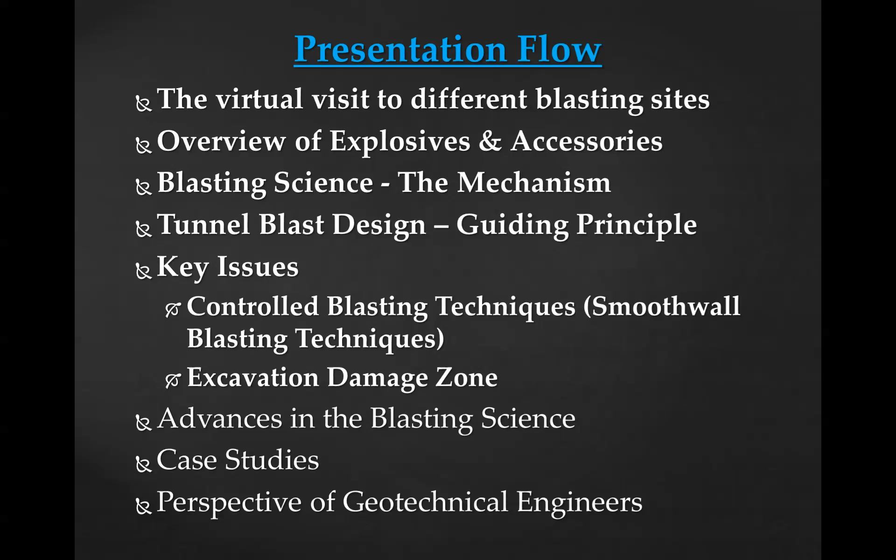So let me take you to the first slide. As we all know, most of you can identify with the photographs itself. This is one of the most prestigious projects of Tehri hydropower complex, and this complete project is excavated with the help of the drilling and blasting system. If you see this PSP 3D layout, left bottom, this is such a complex underground structure.

This will be constructed close to the underground structure which is already in operation, which is at my right side, called Tehri hydropower. So this is Tehri hydropower on my right side, and close to that there is a PSP we are working on. This complete underground structure is right below the hilltop you are seeing in my right top corner. You can see the dam structure, earthen dam structure.

This is one of the most beautiful structures, and I would like to present you some of the critical excavation that has been done in this particular project with the help of the drilling and blasting system.

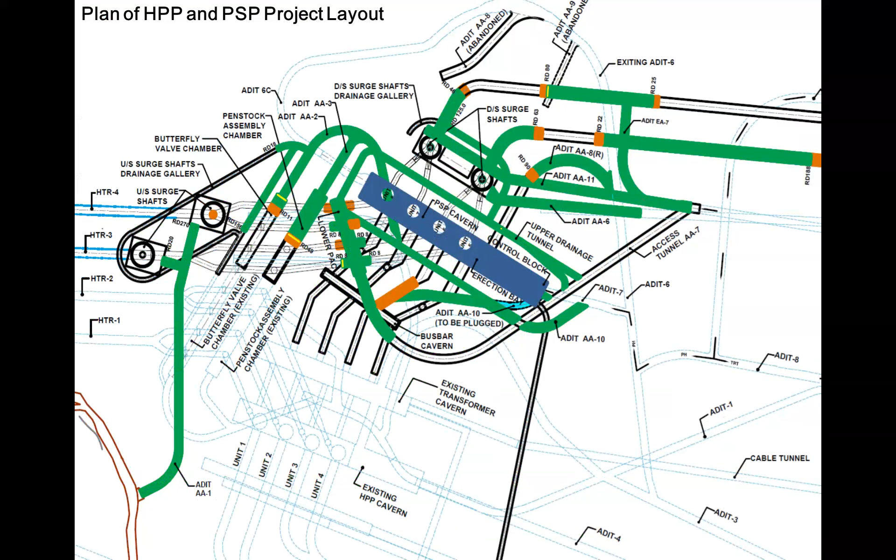If you closely see this dash line, this is basically the old hydropower structures which is already in operation. And the ones in different colors, blue and green, they are under excavation. You can see the blue color, PSP cavern, that's powerhouse cavern, and that is very, very close to the existing operational hydropower structure.

If I show you a simple diagram, see this. The one at my left top is basically the machine hall, where the hydropower generation is continued. And to this machine hall, the powerhouse's main access tunnel is Adit 3, which is in my left bottom.

Now if you see the right top, you can see the distance between existing Adit 3, that's my left bottom, and the new bus bar excavation, that is hardly a distance of 2.6 meters. Please mind the size of excavation going on. Adit 3 is almost 10 meters in diameter, the bus bar is also almost 8 to 9 meters in diameter, and this has been completed very recently.

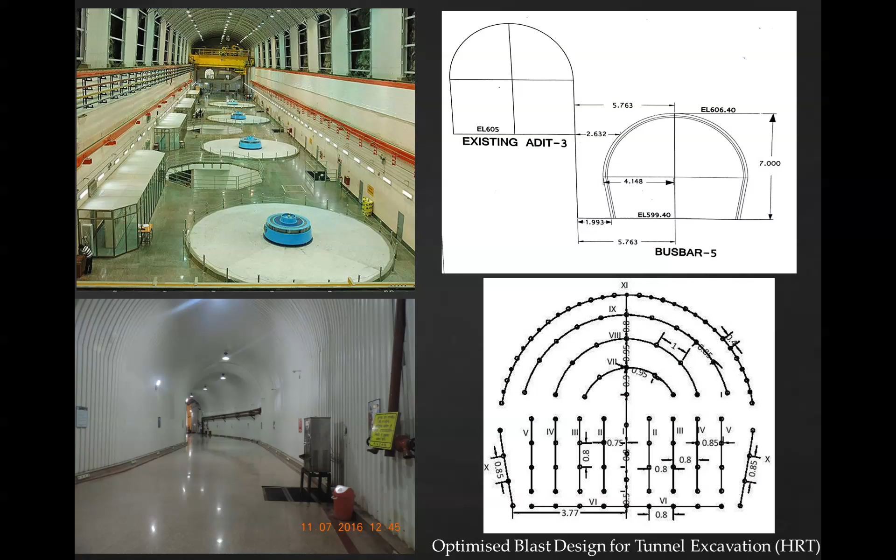I would like to show you some photographs of that particular project. This excavation, you can see, is a major breakthrough recently, around a couple of months back. What I mean to say is, even in a very, very difficult situation with a parting distance of hardly less than 2.5 to 2.6 meters, excavation can be done in a very controlled manner. Of course it took some time for us to get a breakthrough, but fortunately we could do it.

This is another powerhouse, PSP, you can see. I will show you the next stage also with the current stage, and then the breakthrough of the butterfly valve chamber, my top right. This is the machine hall. This was around 3-4 months back.

Now you can see the kind of opening within the same span. There are a large number of openings within the same structures, with parting less than 10 to 15 meters. This has all been excavated with the help of the drilling and blasting system, and it is a large cavern of almost 200 meters in size.

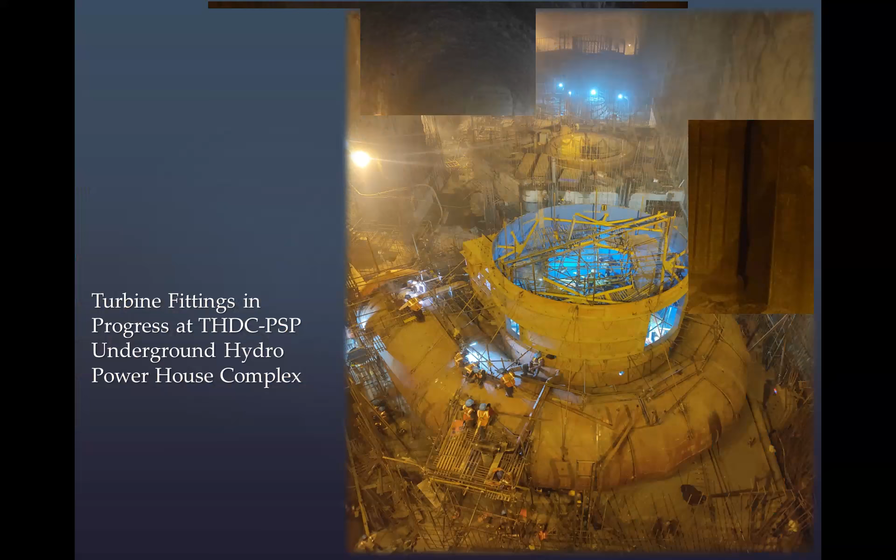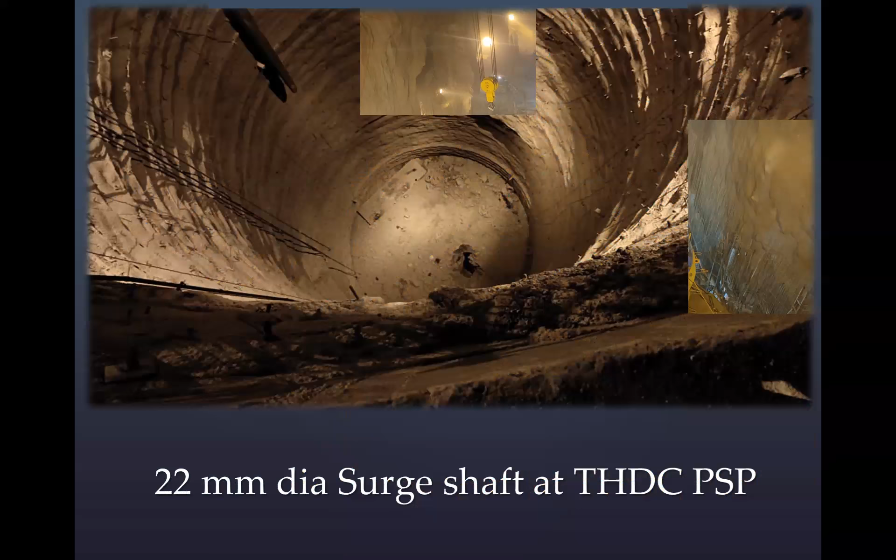This is what is happening now. The machine hall is getting ready, and two turbine pits, the mechanical systems, are actually in progress. Coming to the next one, this is almost 22 meters of shaft. This is also under excavation with the help of the drilling and blasting system, and it is very, very critical. You can understand, a 22 meter underground surge shaft.

Okay, this is another photograph of the Pune metro site. What I wanted to show here is there is a civil court at a distance of 20 to 25 meters, and this excavation is going on. See what happens when judges are close to your construction site - you have to be very careful, and the kind of precaution that is in place.

There is a tunnel going below this building, completely excavated with the drill and blast system. So the vibration limit, which is very stringent in our Indian condition, has a further restriction by the Supreme Court. They are allowing 2.5 millimeter of peak particle velocity, not more than that. So we need to be very careful for excavation within the drilling and blasting system.

This is one desilting chamber. You can see there's such a large cavern. This is a THDC project, Vishnugad Pipalkoti Hydro Power Project. I'll go to the next one.

Now this is what I was trying to explain - this is partly an extension of what Professor S.A. Gupta Saab, who was from Mumbai Metro, was explaining, and I am associated with them for this drilling and blasting system. This is basically the case of Kalba Devi Metro Station. This is a 3D diagram, and this complete NATM excavation is to be done with the help of the drilling and blasting system. This complete structure is just 15 meters below the surface level.

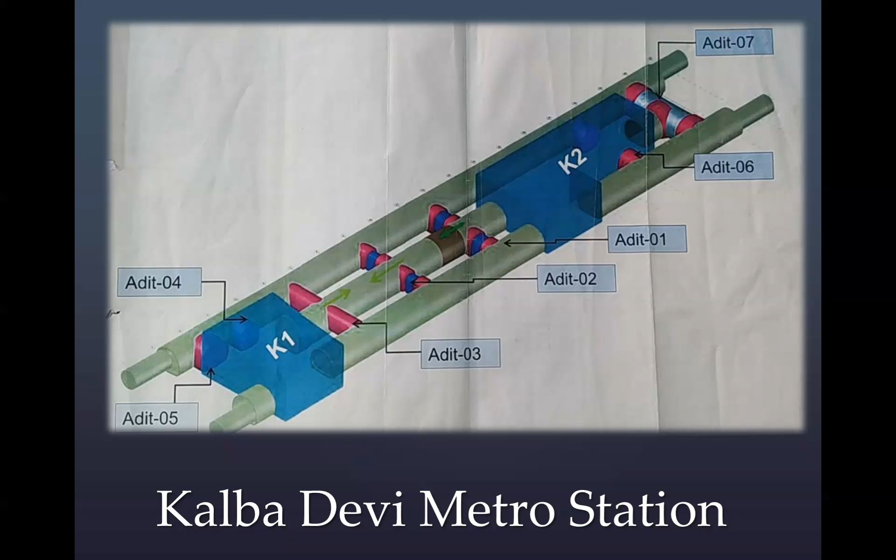If I show you further, you can see different adits, which are in green color - these are all to be completely excavated. And if you see from the top, this is the case wherein you can see high-rise buildings which are in very dilapidated conditions. Even a small amount of vibration can actually create a problem.

Apart from this, there is another factor of human perception also. As Gupta Saab told this morning, people are residing in these houses, and one is the damaged part, but the second part is basically how they are going to perceive the vibration. So it's a complex urban built environment wherein you have to complete this excavation, and you can see at the bottom right. I will show you some more photographs so you can appreciate that.

You see this? This is how small progress we are doing, but I tell you, in the background of this, before starting this drilling and blasting system, they were doing what is called splitters, with more than 200 holes. You can see in my left top the small holes - they were basically for splitters. With this, they took almost 24 hours to advance 30 to 35 centimeters.

Now, with the help of the drilling and blasting system, we are able to advance 1.2 meters in a 24 hour cycle time. So you can understand the kind of impact on the economy and project cost, not only in terms of investment, but also in terms of progress of the work.

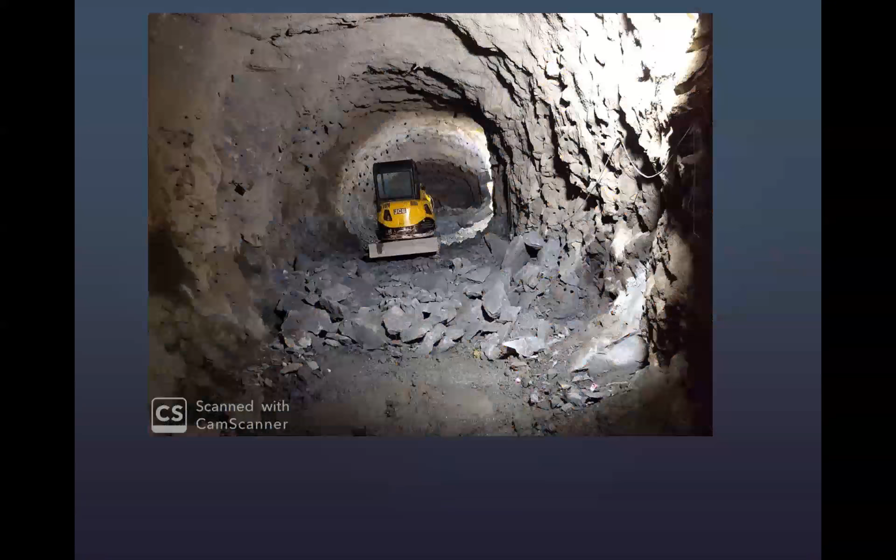I will show these pictures and come to that also. You can see the next stages, and in my right bottom, you can see the kind of progress we have achieved in this underground central cavern. So what I mean is, with the help of the drilling and blasting system, we can achieve wonders, provided we practice doing things in a scientific manner.

These are all different photographs of the same Mumbai Metro project site. You can see the overbreak also at the periphery, the crown area, how beautifully it is controlled. You can see another view of this central cavern.

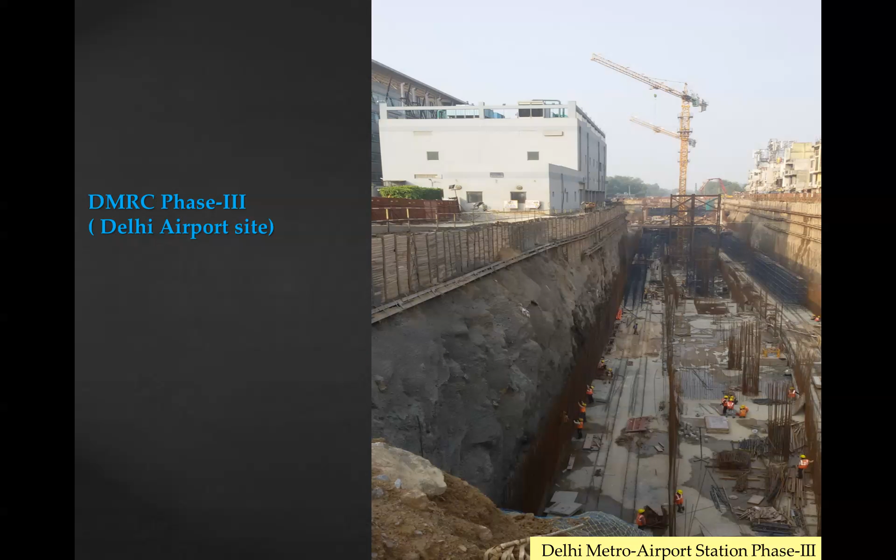Okay, this is an old one, around 4-5 years back, from the Delhi airport site. This is not absolutely because of the drilling and blasting setup - this is basically a blasting assisted mechanical system, I call it. But why I'm showing you this figure is because there is a chiller building, and close to that building there is hardly 2 to 3 meters of distance from where the cutting is started.

So there was dynamic loading because of the blasting, and you do not have blockage also. With all this construction work going on, it is now operational, and the Mumbai Howrah railway line third line project is completed. This tunnel, I tell you, the speed that has been granted by CRS, that is Commissioner of Railway Safety, is 120 kmph. So this is the achievement of this particular project.

This is basically the project site before starting, in the Satluj River. You can see the left bank and the right bank. Now I will show you the next stage. There are different villages called Harnola, Chamian, Kachol, and Kyan. I understand many of you from the audience would have visited or maybe been associated with this project also.

Now coming to this, if you see, the point I want to stress here is there is a pond, and beyond that there is another. I will show you here, let me just move this to the right. If you focus on the decanting area, on the right side you can see there are benches, almost 10 benches. They are 10 to 15 meters high, and they are almost vertical. This is to be excavated from the virgin rock mass.

And there are different structures, villages where this decanting is situated. Actually, there is a village, Chamya village, as they call it. So these are all different types of bench excavations that have been done, and I will show you the photograph. This is actually you can see here - you can see the half barrel marks.

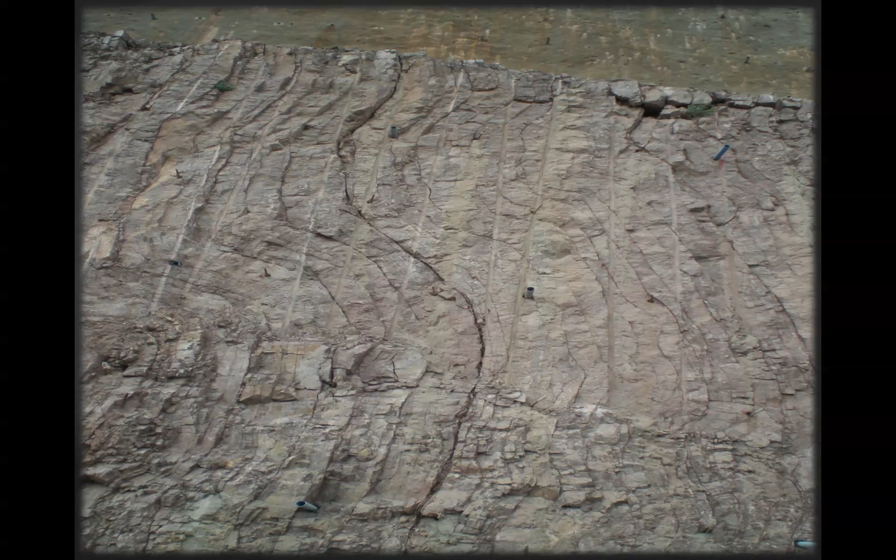That is what, if you come across these contractual documents, you will find that the blasting expert should show at least 50 to 60% of half barrel marks. You can see here, even in an adversely geological condition - not ADG, but a fractured rock mass, jointed rock mass - this is basically limestone, pink limestone, with huge intense folding also. Even then, your drilling marks are visible. You can see here also.

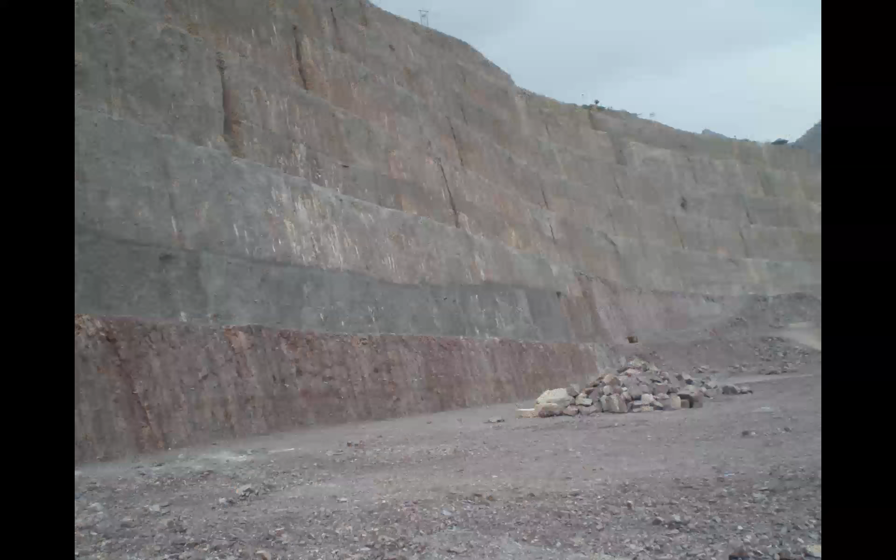And finally, all the ten benches that you can see from here, they are so beautifully excavated like this.

So with this background, what I mean to say is, if you do things in a scientific manner and have a sound understanding of the technical matter and how it works, we can contribute in a very different way and do a good job.

So what actually is a drilling and blasting system? I am going with some basics because I understand most of you are from a different background, and this will be slightly difficult for you also.

Any excavation is nothing but breaking the rock mass into small pieces. The rock mass is available in different block sizes, which may stretch right up to 100 meters. With the excavation process, we try to reduce it into smaller sizes that can be handled with our mucking equipment, meaning reducing it to a size less than 1 meter square, or passing size less than 1 meter square.

So what we need to do is give some external energy which exceeds the peak strength of the rock mass. This is done with the help of two things. One is a mechanical system, which Gupta Sahab explained this morning, including full face machines and partial excavation methods, so I will not focus on that part.

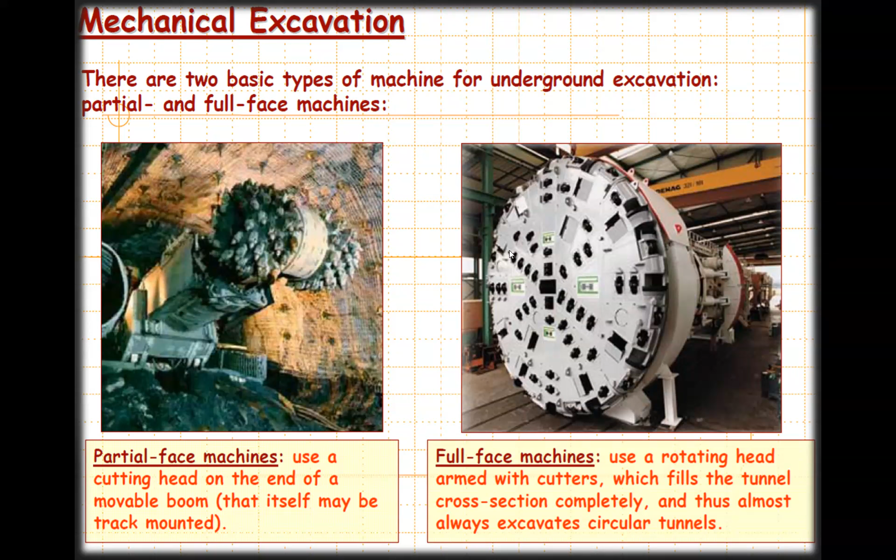There is one point I would like you to understand: the fundamental difference between blasting and machine excavation. In machine excavation, we give external energy with the help of some controlled regulatory mechanism—more time and lesser energy, in a controlled way.

But in drilling and blasting, it is not like that. Once an explosive is initiated, you do not have any control over it. Basically, we are giving a large amount of energy in a very small time. That's the fundamental difference. Because mechanical systems have a regulated supply of energy, the damage is less, or if not planned properly, you do not have control. But in blasting, if you commit a mistake, you do not get a second chance—the very first trial itself has to be scientific and controlled.

So what are the fundamental differences? Of course, mechanical systems are much more productive. Let me show you some figures—in one of the projects, we are getting 20 to 25 meters advancement in a day with the TBM system.

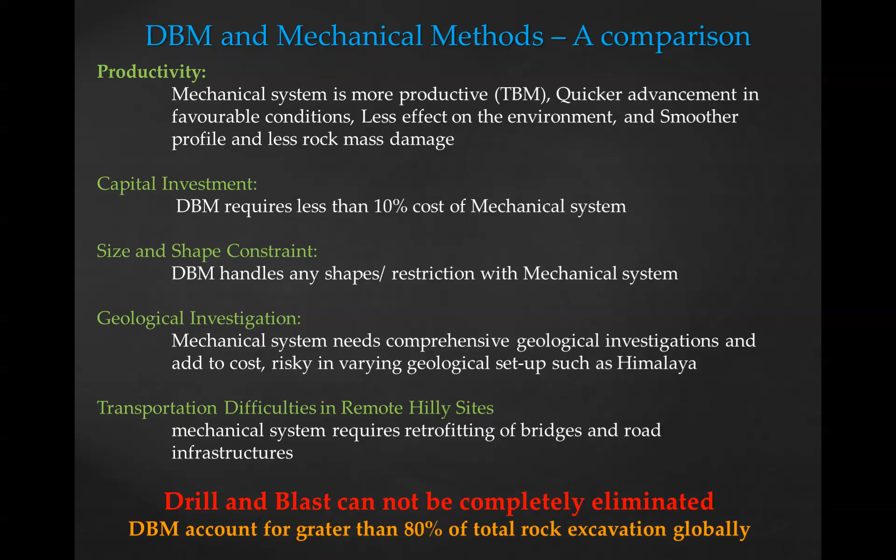In a nutshell, even if you see much more excavation being done with the help of TBM in metros, drilling and blasting systems cannot be eliminated, because there is so much excavation that can only be done with drilling and blasting or splitters. And in case of splitters, there is a heavy problem. So the way ahead is basically how to enhance our technical competence in this drilling and blasting system, so that selectively and scientifically we can apply it. Fortunately, we have lot many cases wherein we can see successful application of controlled blasting techniques, even in very heavy urban built environments.

In a very simplistic way, a conventional drilling and blasting system can start somewhere around the drilling system. We need a drilling machine. Let us start with survey. First, we survey, mark the profile, drill the holes, and load. Load is a term normally used in blasting science to put explosive into the holes. After loading, or what is called alternatively charging, you take the blast. This is basically initiation or detonation of energetic material. Once it is done, the face is ventilated with the help of a mechanical system or blowers. Then excavation is done, and then you do the support system, scaling, and then support system again. So this is one simplistic way of understanding how the conventional drilling and blast system goes ahead.

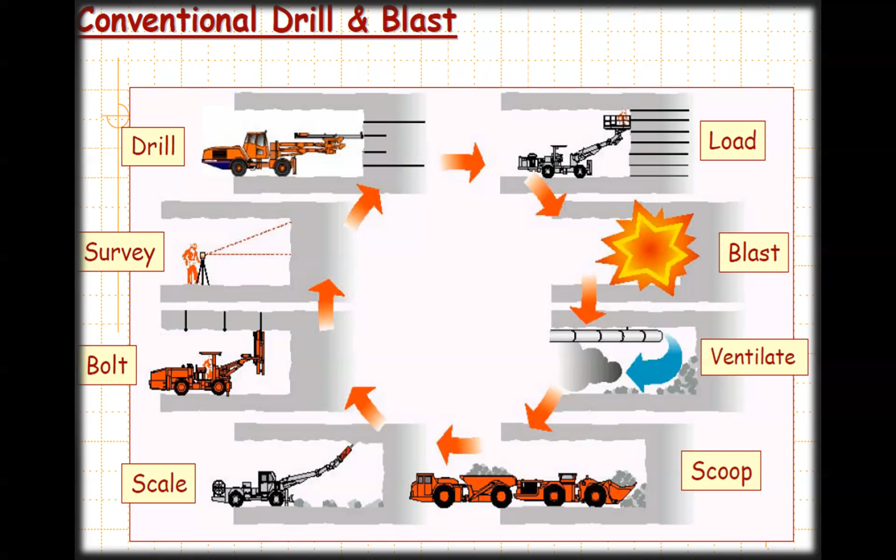I want to show you this because some of you might not have seen how the system works. I know you are all aware about the drilling machine, but there are recent advances where remotely operated multiple jumbo drilling equipments are available. You can drill 3 holes at a time simultaneously. They can be remotely operated, giving you a completely mechanized system. Whatever drilling pattern you want, you can fit into the system, and once the machine is positioned, it can take care of the drilling. That is the recent advancement.

But before that, let us try to understand what blasting actually is. What happens when we put some explosive inside a hole, and once the energy is supplied, what are the things that happen within a fraction of a second? So the first term I'm going to introduce is detonation. The energetic material, or the explosive, when you give some shock to it, it detonates. Detonates means very fast burning, accompanied by release of energy in a very short duration.

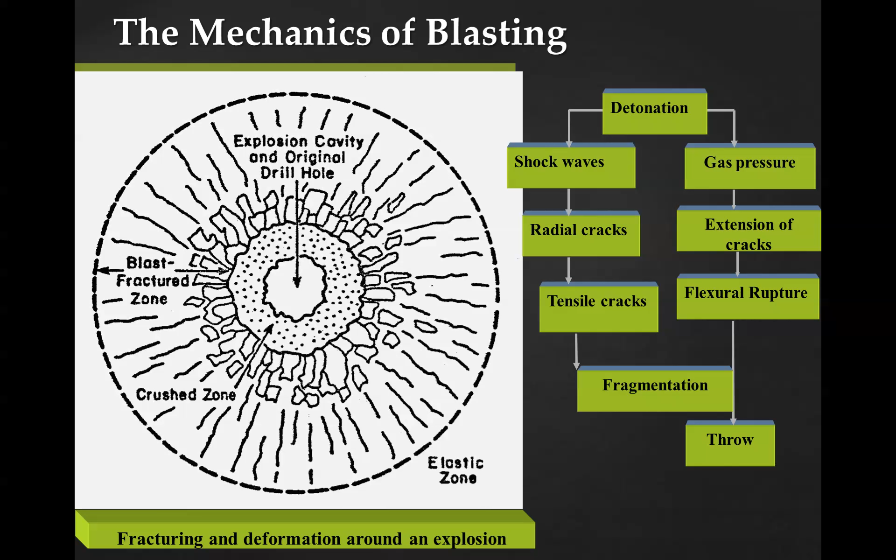Just to explain some basic understanding, an explosive, in a very simplistic way, is nothing but something that burns, but the difference is it burns at a very fast rate—fast meaning around 4,000 meters per second. So when it burns, it has a combustion component which works as a fuel, and then we have a combustion component called the oxidizer, because it supplies oxygen when it's inside the hole.

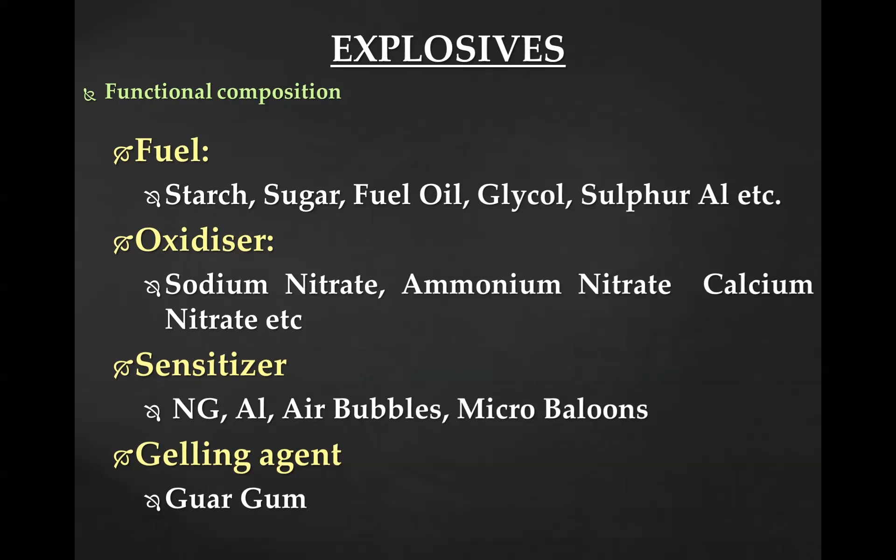There are some chemical combustion reactions to make the product stable. Fundamentally, for us, it is a material which has basically a fast burning rate, more than sonic velocity actually, so that is called detonation.

This is one term I wanted to explain. You see here 601, 901, and here also Superpower 90. What I want to show is basically the material comes with different properties. One of the properties is strength of explosive. Strength means basically what is the measure of release of energy. This 90 means 90% strength, it's 90% release. It's basically in reference to one old explosive which is called blasting gelatin, but let us not go into that part. Basically, when it is 90, it is 90% strength. This is the most powerful which is available.

If you see here 601, that is basically 60% strength. So when we talk about the use of this, when you go to the site, you can see what type of explosive the contractor is using, and if you see there is overbreak or some rock mass damage, you can always insist he use 60% strength or 90% strength accordingly, as per the rock mass condition or the strength of the rock mass.

Then we have some other properties you should understand. One is strength, that I just explained. Velocity of detonation is basically, the cartridge that I showed you, how fast it gets consumed when detonation starts from one front to the last cartridge, so how fast the detonation front moves - that is basically speed. So velocity of detonation is how fast a detonation front moves within a hole. That is velocity of detonation, and that is also accompanied by release of detonation pressure. So strength, velocity of detonation, and detonation pressure - these are all important parameters.

Apart from that, there is another parameter called sensitiveness. Sensitiveness is nothing but, as I told you, all these explosives need some shock to initiate. When we talk about sensitiveness, it's basically how fast or with what amount of shock this detonation is achieved in these explosives, because that is one of the most common reasons blasting explosives fail. If it is not sensitive, or not optimally sensitive, possibly the detonation will not start, and that becomes a very dangerous situation. So it has to be optimally sensitive, number one.

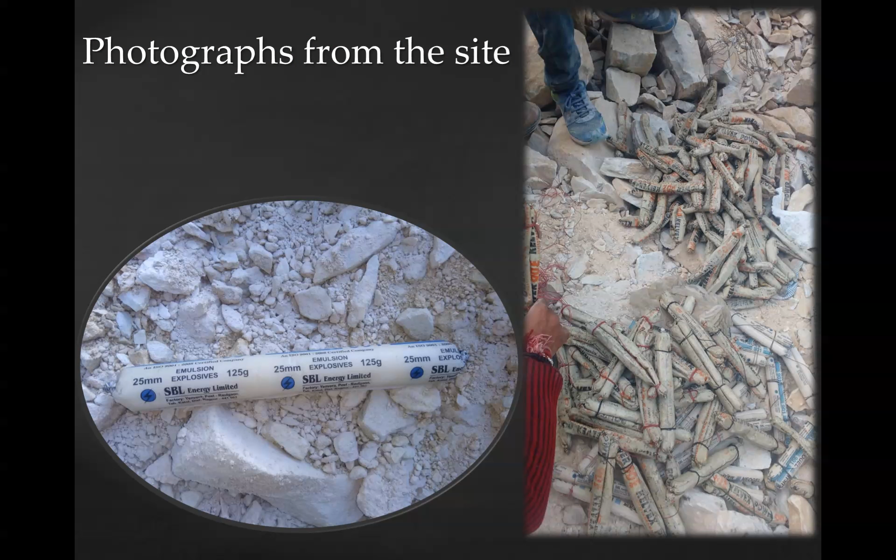Okay, there's another thing you can see in the bottom portion on the right side. What these people are doing, you see 2-3 cartridges tied together. What is happening at a remote site? Suppose we have a hole diameter of 45 mm and the cartridge available is 25 mm diameter. What they do is tie them together and try to insert this. This is not the correct practice, because it actually makes a difference in a technical way, called coupling of explosive materials. What is the annular space we are leaving between the hole and cartridge wall? That's very important. You cannot keep it very large, and at the same time you cannot keep it very tight either. So this makes a difference - there is an optimum diameter of hole and an optimum diameter of cartridge also.

Another important part is, as I told you, velocity of detonation measures the release of energy content in explosive. With the passage of time this is important, because when you go to a remote site there is a tendency that explosive supply will be delayed. You will be getting supplies even after 3 months, 4 months, 6 months time. So with the passage of time it loses some of its fundamental properties, and that is velocity of detonation. Almost 15 to 25% loss of VOD is quite common when going to remote project sites, and that accounts for loss of production. So when you analyze all these parameters, you'll have to take care of this part also.

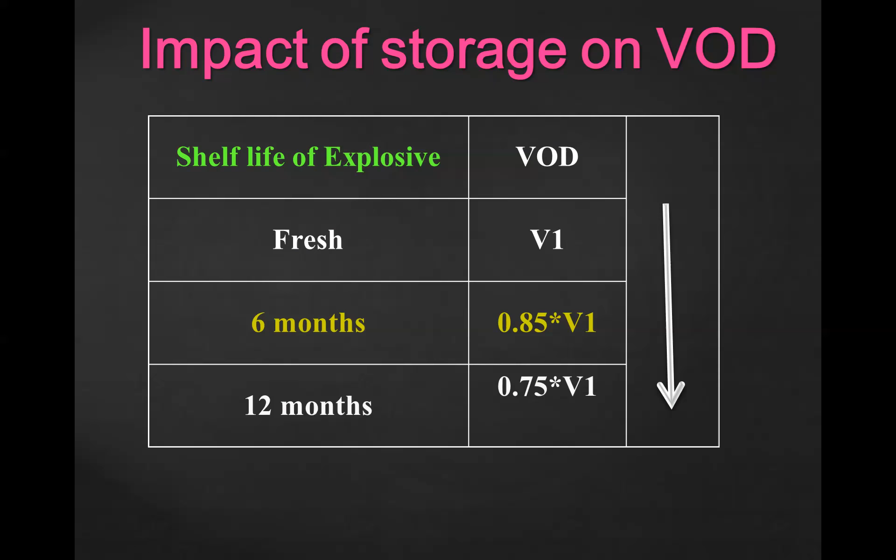So this is something like preliminary things about explosives - I just tried to introduce you, just to have a figure in your mind of how it looks and what you need to understand when somebody talks about a drilling and blasting system. So the first thing we need is an explosive. An explosive comes in different shapes and sizes, starting from 25 mm, it can go up to 83 mm also. Just to have something in mind, the weight is actually 125 grams, and the largest size, which is 83 mm, comes in 2.798 kg. So that is the variation in size.

Now going ahead, apart from explosive, we need an initiating system. Every explosive needs some sort of shock to achieve its optimum velocity of detonation, and for that we use an initiating system, loosely called detonators also. So there are different systems: shock tube, detonating fuse, safety fuse. Safety fuse is the oldest version that you will not come across in infrastructure projects.

I will just try to explain this - what is it actually? If you see firecrackers, the top portion with which we give the first preliminary energy for its initiation, that is basically pyrotechnic combustion. So the top thread portion that you see is nothing but a sort of safety fuse.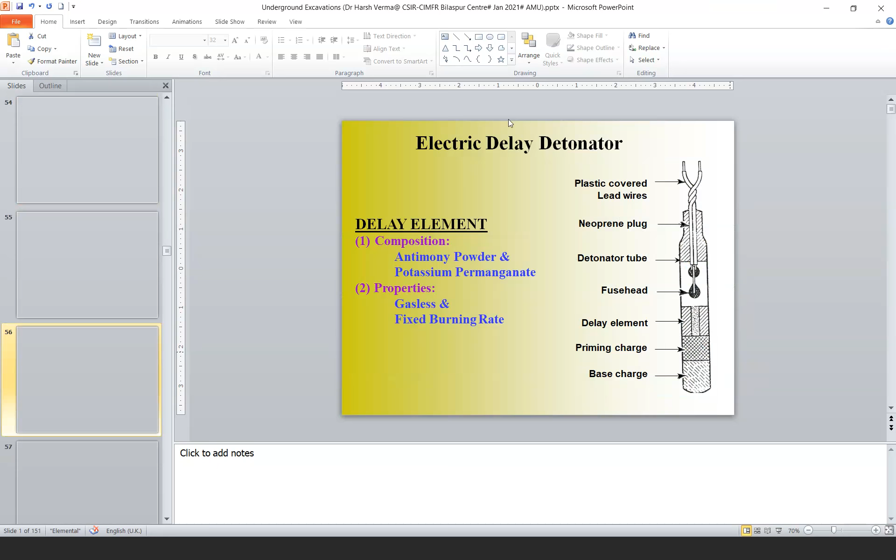So the term I was talking about is basically non-electric system, which is actually used in metro power projects or in urban built environments. So the detonator, I was trying to explain you, this is how it looks like. But fundamentally just keep in mind that these are all the detonators which look like this.

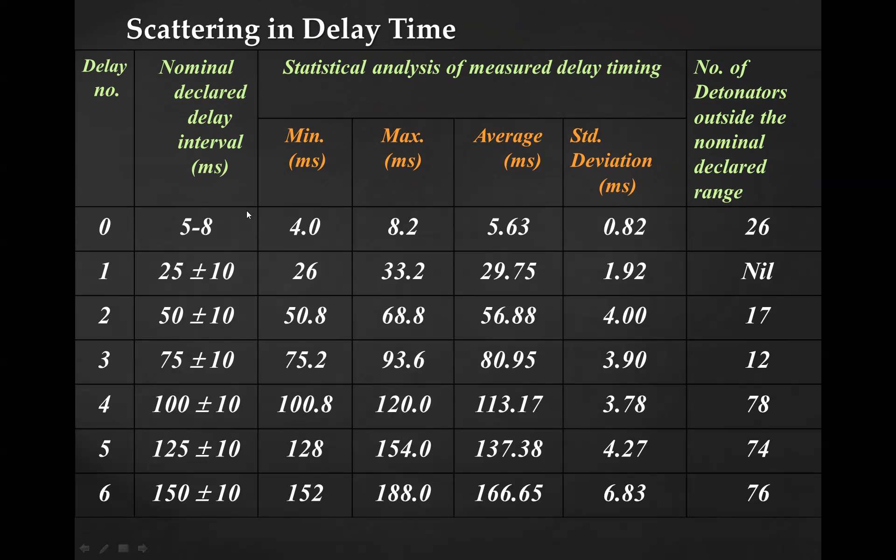With all these systems, the recent advancement is basically a system called electronic detonator system. That is an advancement from this recent technique, which does not actually fail, and we can also assign a predefined delay time, which does not have a limitation of 25 milliseconds or its multiple, or 500 milliseconds or its multiple. We can give any XYZ numbers. So with that, you can optimize the blast design in a more precise manner.

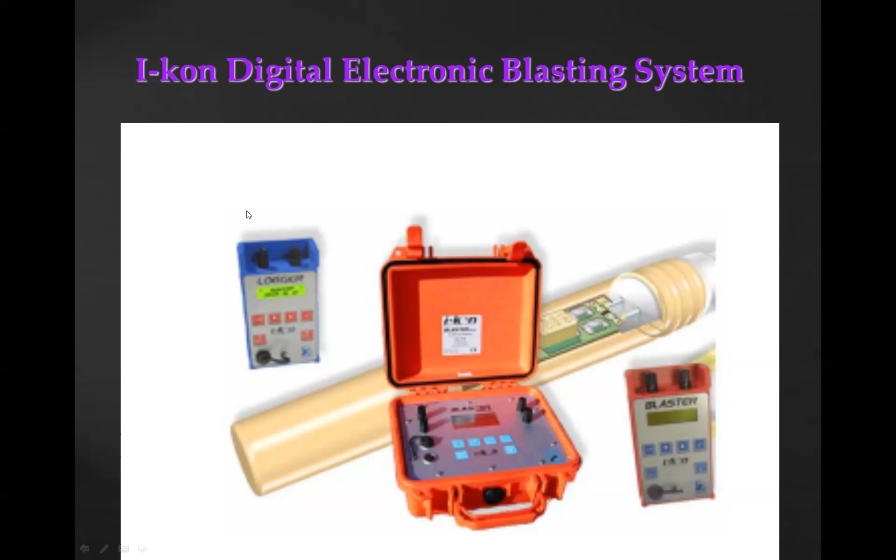I think this one I'll just skip, I'll go to the next one. Yes, this is what I was just talking about. If you see the section, this is a pyrotechnic electronic detonator. You see the complex electronics inside this. And this comes around 1,000 rupees per piece, so you can also have some idea. This is how, you see, it has got its own application specific integrated circuit.

So virtually no possibility of any failure, absolutely safe, 1 in trillion chances of failure, and safe. It does not work alone actually. There are 3-4 systems which work in conjunction, and only then can this whole operation be done. But I will move to the next slide now.

So with this background, now the next thing I would like to develop is how its use is done so that we can get some desired result. For that, we need to understand there are some desirable and some unwanted effects. Breaking up the rock mass into desired shapes and sizes is a primary requirement. We want the rock which is broken to be displaced, and then we need good production, higher pull. But during all this process, we also have problems of ground vibration, air blast, and flying fragments if you do not control it. Then in our civil engineering projects, we mostly deal with the problem of ground vibration, damage to the rock mass, and increased cycle time.

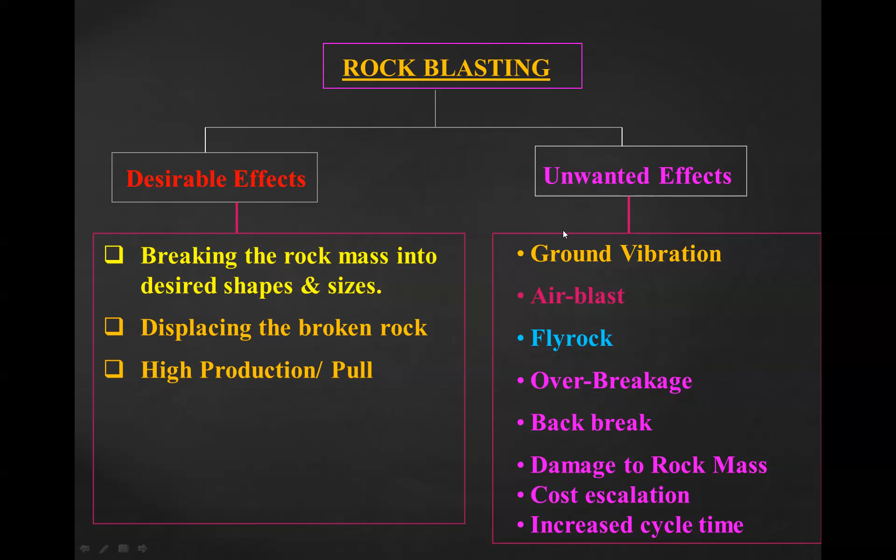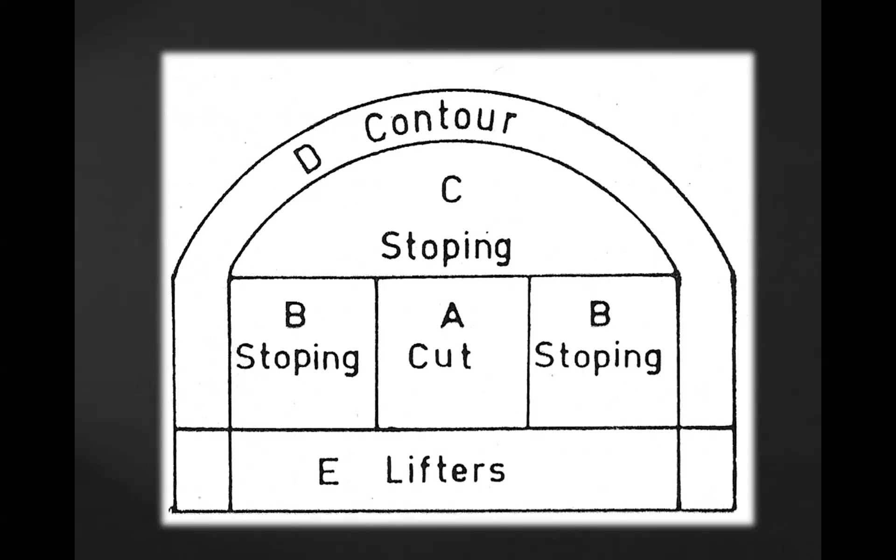If you see a section of tunnel, we divide it for the purpose of blasting into 3, 4, 5 parts. Now please focus on the first part, which is the cut, which is A. Then they are surrounded by 2 parts, B, written as stoping, and then C is another stoping. Then D, which is the contour, and then E is the lifter. So this is how the sequence of excavation within a tunnel should move on. First, you have to design a blast so that the cut portion is moved out, and that works as a free face, meaning space for the broken rock mass to move and swell, because that is how we reduce the vibration. So A and then these 2 B's are to be moved out, then C, and sequentially then the contour portion and the lifters. This is how the sequence moves.

The most important part I would like to drill here is the tunnel blasting guiding principle. A typical tunnel blast design is shown on the right side. This is progressive enlargement of the free face - firing the holes towards maximum free face. You see 1, then 2, 2, 2, imagine the B stoping area and then C area. So it moves, planning a firing sequence to have maximum free face at the bottom of the tunnel so that maximum stoping can be done in favor of gravity. Every time you must ensure creation of the maximum free face before the contour holes are blasted - only then can you ensure the damage is reduced.

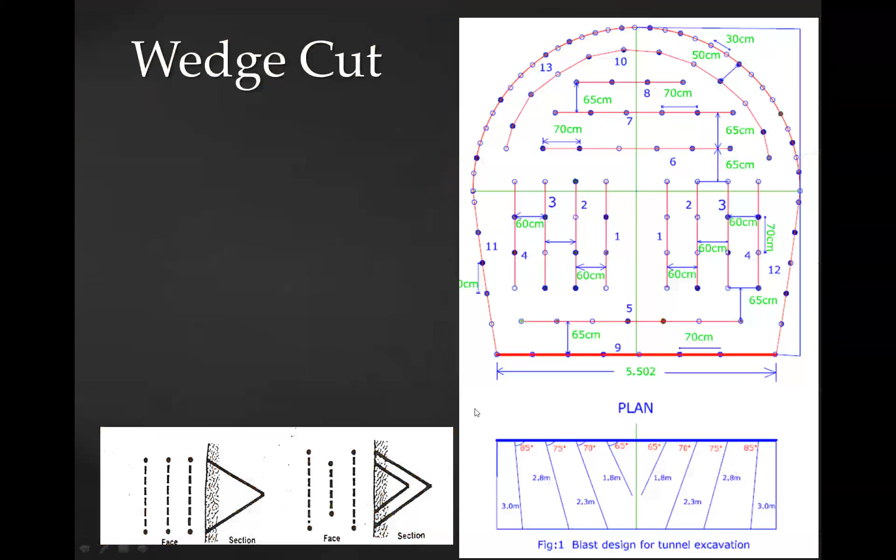The same principle has been applied here also. The first cut hole is done at the center. Then if you see the right side second photograph, the top one, the free face is created, and I am enlarging that in the right side and the left side, gradually getting my tunnel excavation. So this is how it moves - simple. This is not that important basically.

Another important part I would like to share is how do we measure tunnel blast performance. Because we will not be directly into execution, but if somebody reports to you the parameters used in the blasting operation, with these thumb rules you will be able to understand what is pull - if you have a hole depth of 3.2 meters, what advancement of the face are you getting?

It can vary from 1.5 meters to 0.8 meters to 3 meters also. If the rock is very weak, you will not be allowed 3.2 meters - you will have to restrict the round length, maybe 1 meter, 1.5 meters also. What we want is maximum advancement - out of a certain drill depth, what is the percentage of advancement we are getting for that particular round.

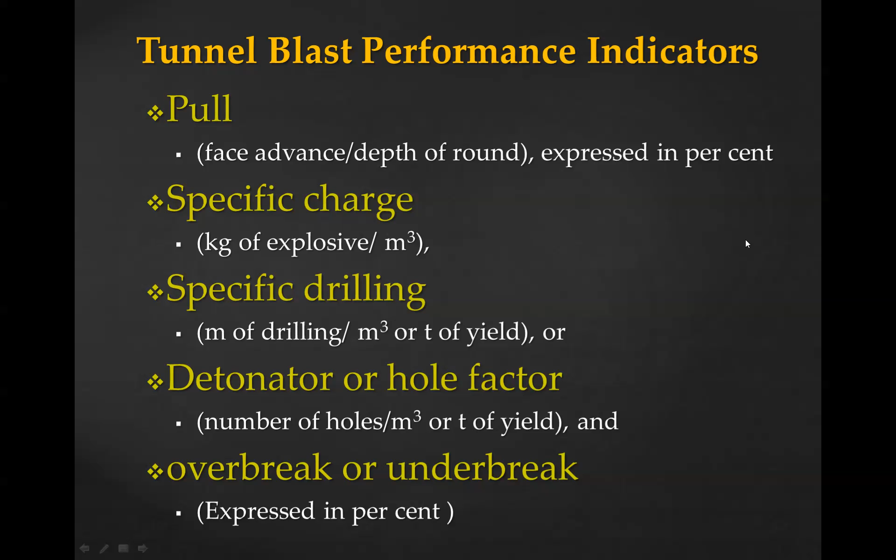Similarly, hole factor or detonator factor - these are some parameters that you can easily understand. Just to give you some idea, this is how you can assess the performance of a blast in a tunnel.

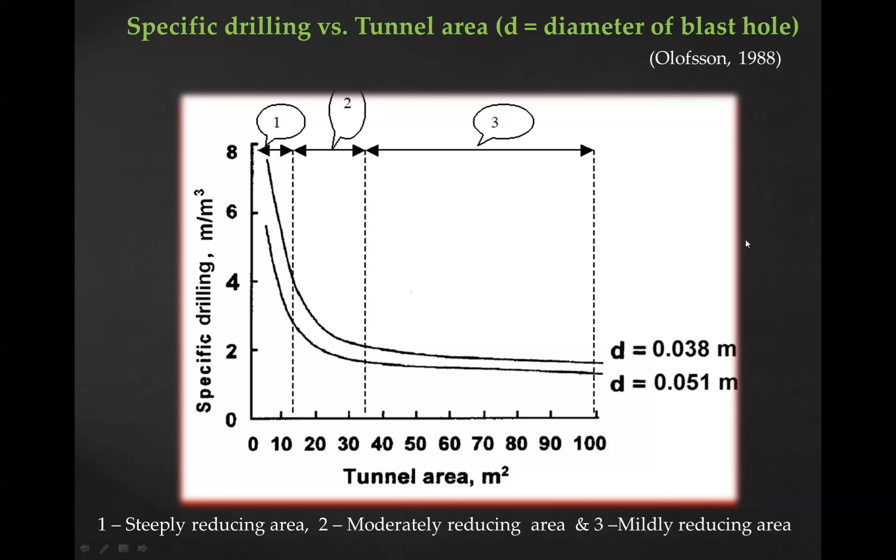But as you move beyond 35 to 40 square meters, which is normal for our HRT size, it becomes almost optimized. What we need is actually a very, very 1.2 to 1.4 kg per cubic meter of rock excavation explosive to give you good advancement. So these are all the parameters that you can have. Similarly, specific charge also: the smaller the size of a section area, you need proportionally more explosive to get excavation. But as size increases, the unit amount of explosive needed will reduce. This is some interesting finding that I have shared earlier in some of the presentations, and I would like to share with you once again.

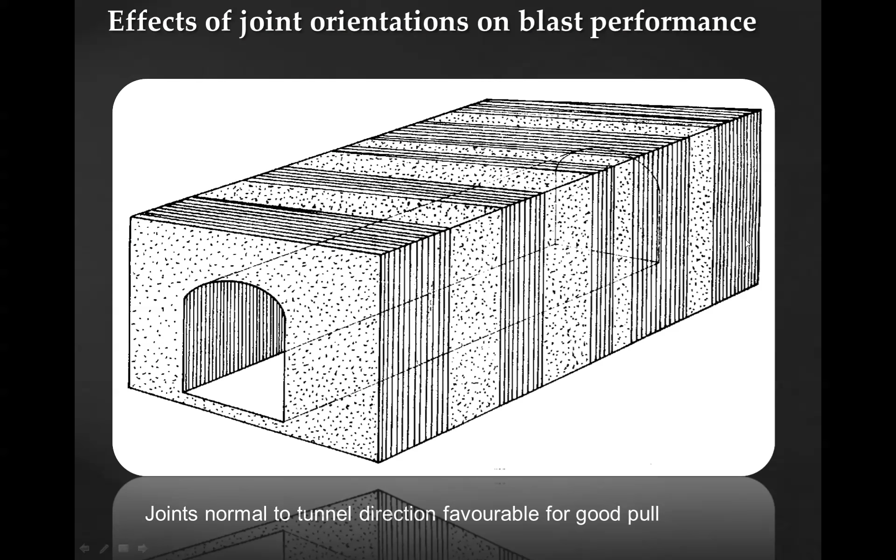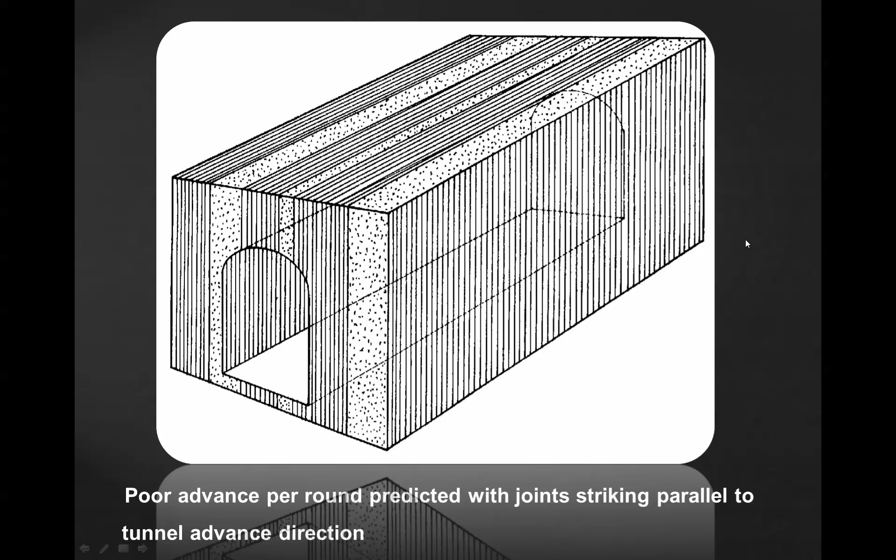You will have to understand the joint. When the joints are normal to the tunnel direction, it is favorable for good pull. But if the situation is different, this is the case where your joints are parallel to the tunnel advance direction, you won't be getting this. So if this is the case, just barely increasing the explosive quantity will actually damage the rock mass. It will not give any good results. It will not be improved.

Similarly, if the right side wall is more prone to breakage with joints at an angle to the tunnel direction, you will tend to get some overbreak in one direction. So these are all some small insights that you need to understand.

Now let us go quickly to controlled blasting technique. What are the fundamental guiding principles, and what is the takeaway for us as civil or geotechnical engineers?

Fundamentally, any controlled blasting technique is a technique wherein we try to reduce damage to the surrounding rock mass to a minimum level. It improves the competence of the rock by restricting growth of uncontrolled fracture. And at the end, what we are getting is the load carrying capacity of the rock mass is retained. We are trying to do that. We do not create a problem for the rock mass so that the inherent strength of the rock mass is not lost. I will show you some figures wherein you will see how the strength is getting reduced. And of course, the desired roof curvature is very, very important.

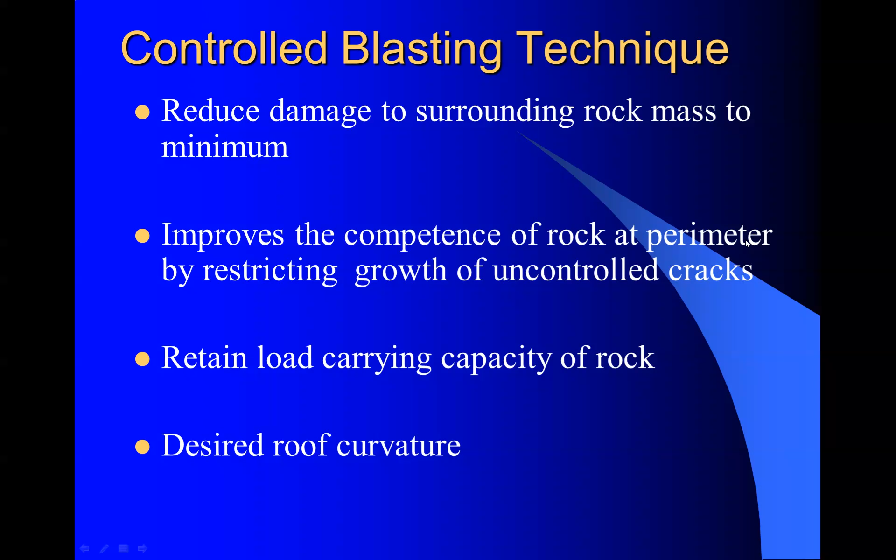So what we do is basically, in any controlled blasting technique, the governing principle is the spacing of the holes. They should be closely spaced, and it should be decoupled - meaning the diameter, the annular space between the explosive column and the hole wall within a hole, that should be decoupled. There should be some annular space, because if you allow some aerial space between these two, there will be adiabatic expansion of the detonation pressure, and ultimately the pressure on the rock wall will be less, and therefore the damage will also come down. The explosive charge should be distributed within the hole, and there should be less delay between consecutive holes. So these are all the guiding principles which actually help.

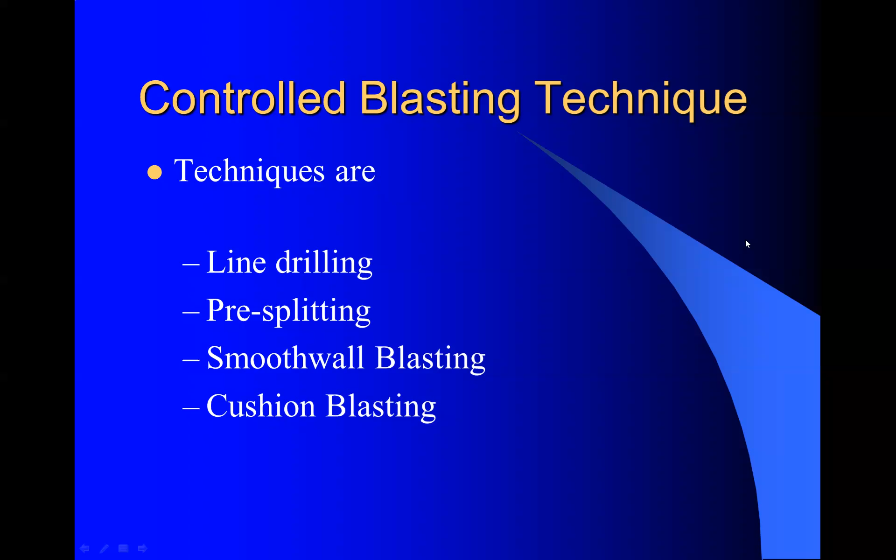And there are four techniques: line drilling, pre-splitting, smooth wall blasting, and cushion blasting. But in case of underground infrastructure projects, what we are mostly coming across is smooth wall blasting technique. So I will show you some photographs wherein this has been done.

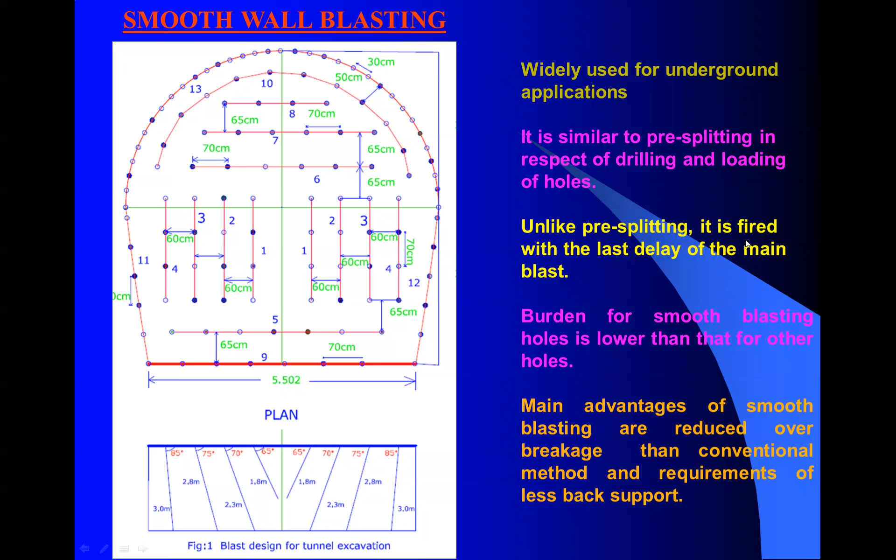What you need to understand is, in any smooth wall blasting, if you see the contour area, the tunnel profile, you will see the topmost crown portion of any tunnel blasting has a particular spacing of holes. Unfortunately, I could not show you exactly how it is charged, but it's closely spaced, and the penultimate row of holes and the ultimate row of holes have smaller spacing. And then you see the firing time also, which is quite high. So these are all the fundamental techniques, but please remember what a smooth wall blasting technique is - it's actually used in underground excavation.

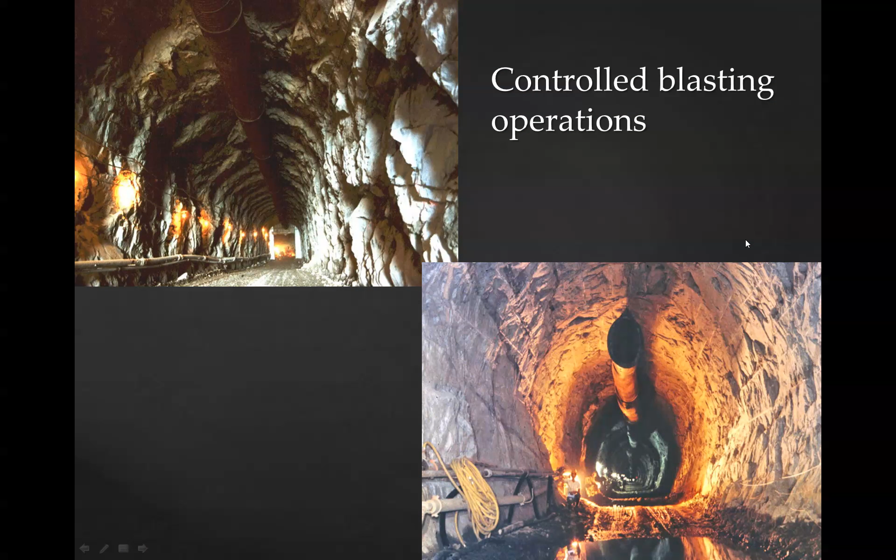You can see the results also. This is one single point boring tunnel project in very, very hard rock. You can see the profile of the rock mass. When you do not use controlled blasting technique, the figure you see in the left top corner shows what is called extensive damage to the rock mass, overbreak. Whereas in the right bottom, you can see the line, the hole marks. That's basically - of course, I have taken this from the net, just for your reference.

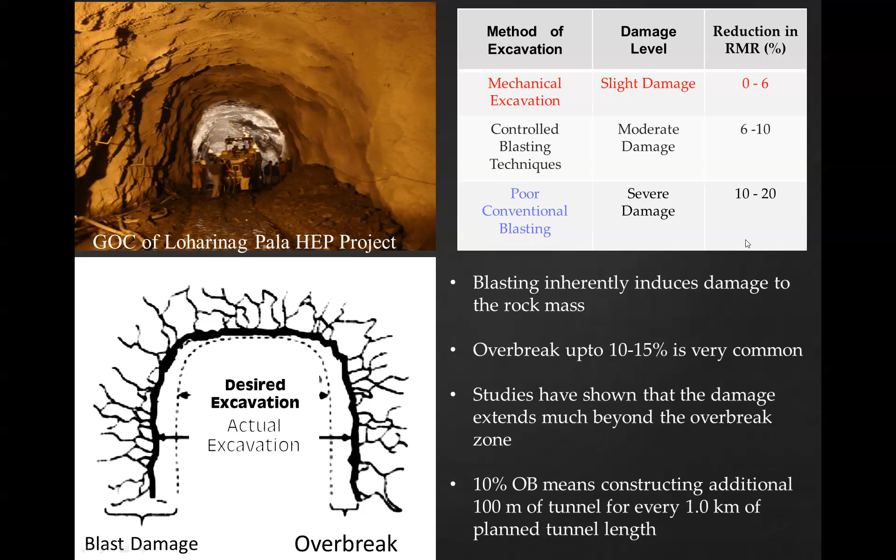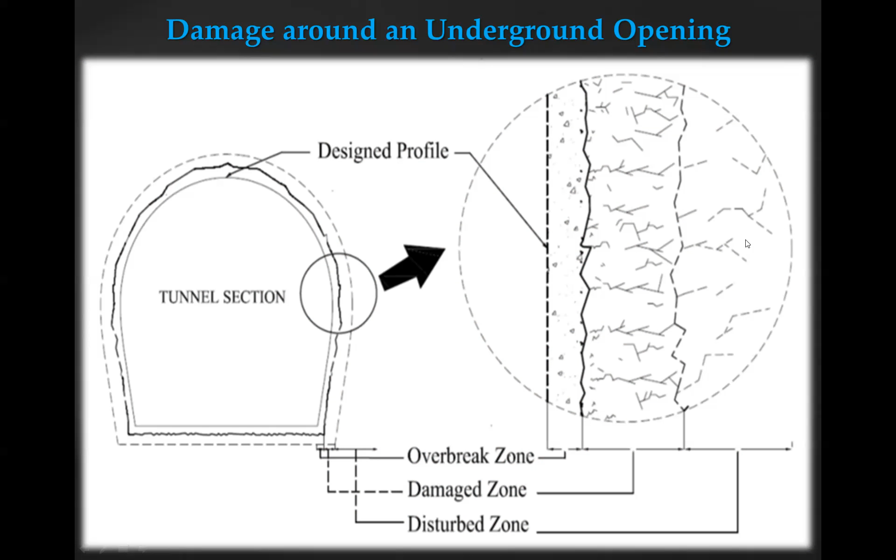Let us see this. If it is a tunnel cross section area, there is a design profile. Beyond the design profile, there is an overbreak zone, which is simply over excavation. Beyond the overbreak zone, there is a damage zone, meaning irreversible changes in the physiomechanical properties of the rock mass. Beyond the damage zone, there is a disturbed zone, wherein the rock mass properties lost because of blasting will be reversed back over a period of time. That happens actually.

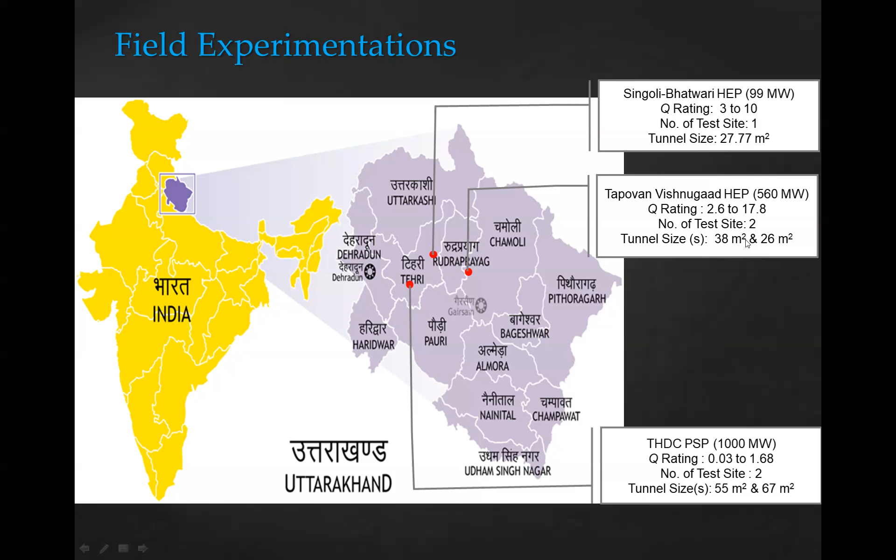These are some parameters that I will not go into in detail. I will instead show you some experimental results that will be more helpful. I have conducted some experiments across case studies of 3 project sites, mostly hydropower projects, and I will show you the data we collected.

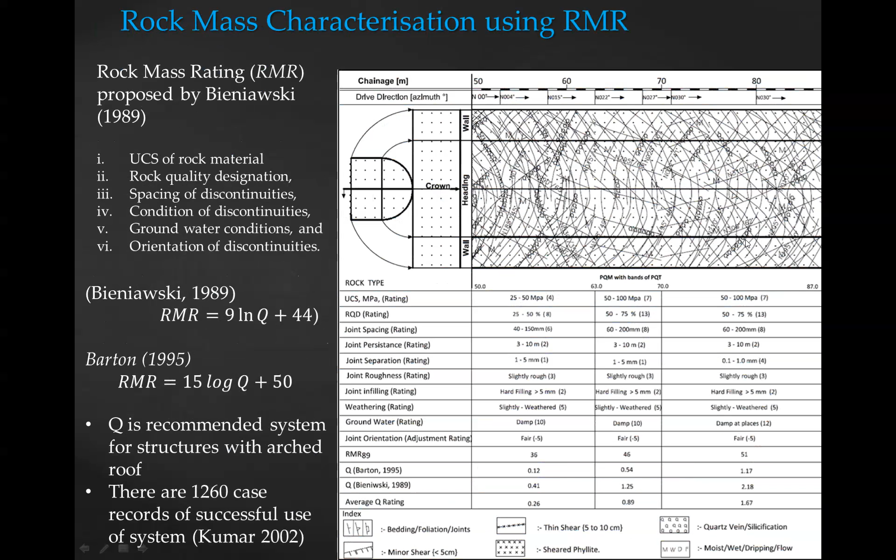We performed tunnel blasts and got some data, and we did rock mass characterization with different parameters, along with extensive vibration monitoring. This is a single event at a hydropower project, in a headrace tunnel. These are all the vibration monitoring equipment we used, consisting of geophones and mics.

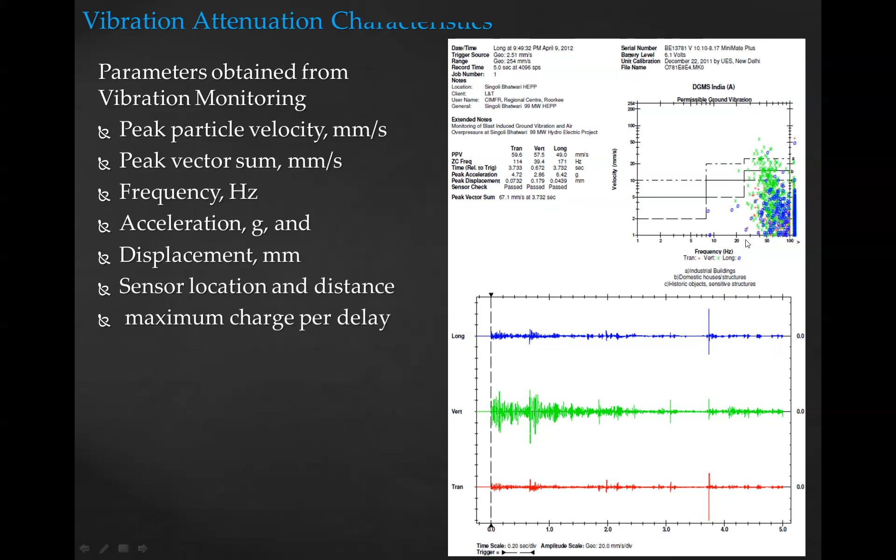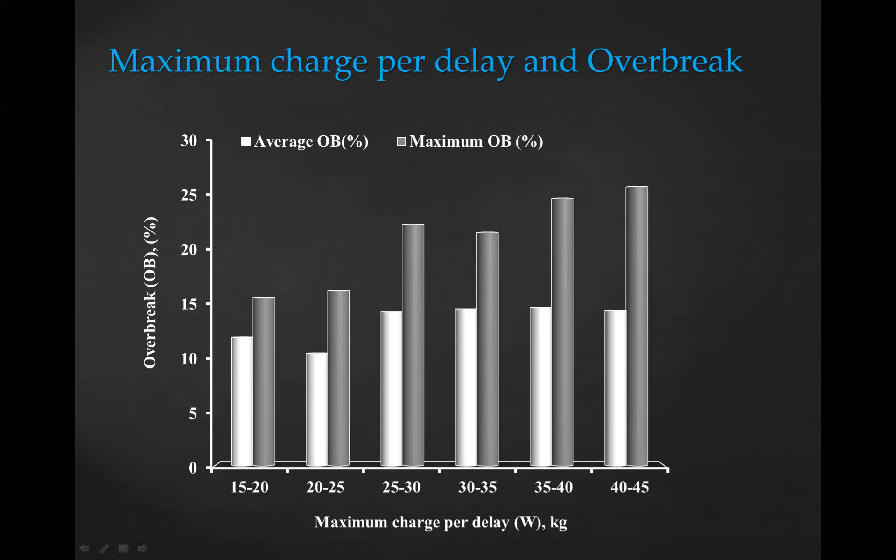It is not something that plays a pivotal role in the generation of vibration. What makes a difference is, within an 8 millisecond delay time, the amount of explosive you are firing — that makes the difference. This is called maximum charge per delay. We need to distribute the explosive in small parts, assign certain delay times, and the smaller the amount of explosive for a particular delay time, the smaller will be the damage.

I will not need to explain this further — these are some empirical correlations that we tried to understand and evaluate. You can see this in some of my papers published in Tust and JRMGE, which are available, and also in the RARE conference proceedings.

One important part I'd like to discuss is scale effect analysis. Those into numerical modeling understand this term, though here it's different — it's a ratio of the tunnel cross section area and the block size. If the block size index is lower, meaning an opening in a fractured rock mass, or if it is an opening in a massive rock mass, this can help you understand the impact of the complete operation on overbreak.

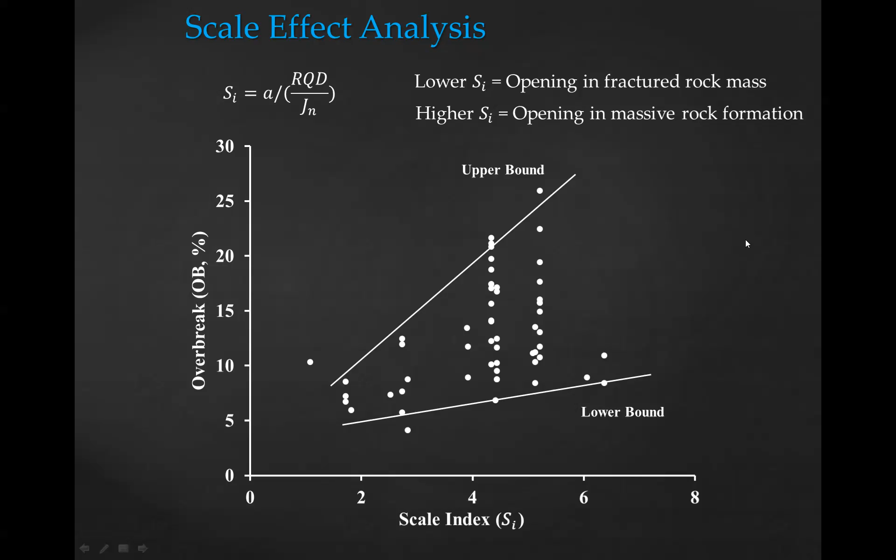This is something different because we sometimes have disputes with the contractors — many times it's unclear whether the rock mass is creating the overbreak or it is blast-induced overbreak. This parameter can be used to delineate between these two. I will go into this in more detail.

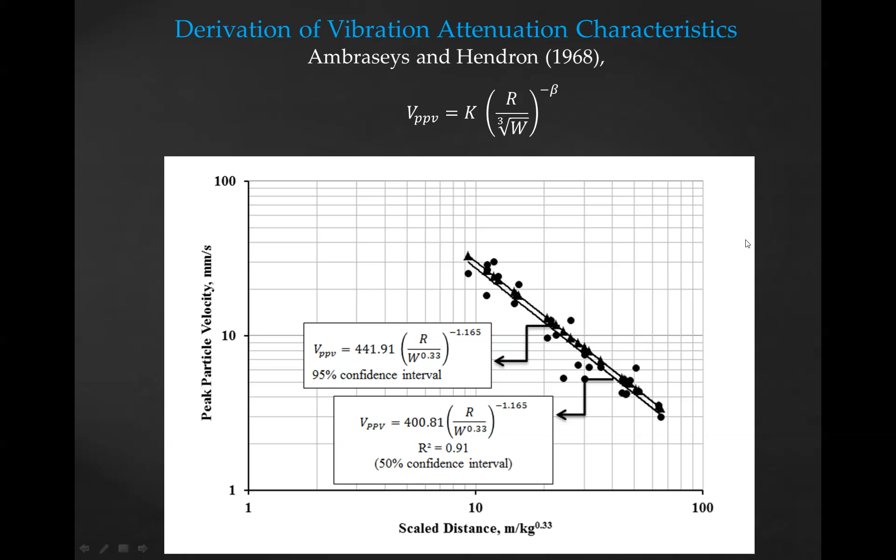For example, in a basaltic rock mass, if it gets damaged at a critical peak particle velocity of around 1550, then even the distance up to 1 meter is damaged.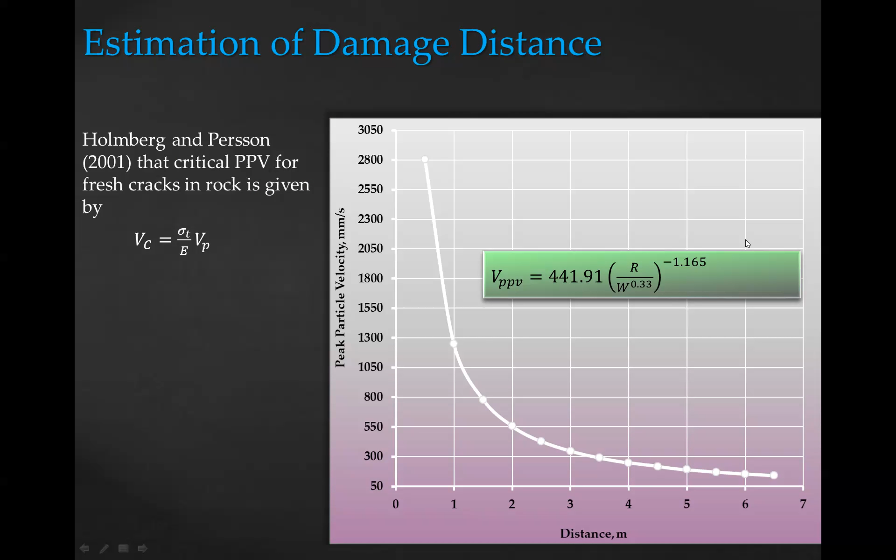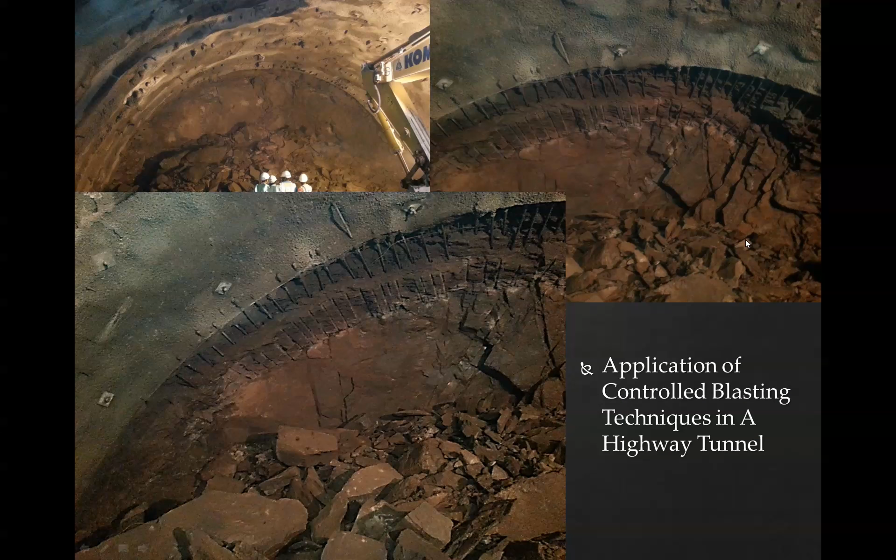That is how you can actually compute. I will show you some more things. Based on some blasting exercise we have done with all this background, I will try to show you how beautifully the results can be obtained in a tunnel blast, virtually with no overbreak, and it is fantastic progress.

Now, these are all some photographs. Anyway, I will show you some more recent work that we have carried out. This is basically on a hydropower project. I will try to tell you what is happening inside the rock mass at a very microscopic level. This is what we are seeing at the surface level.

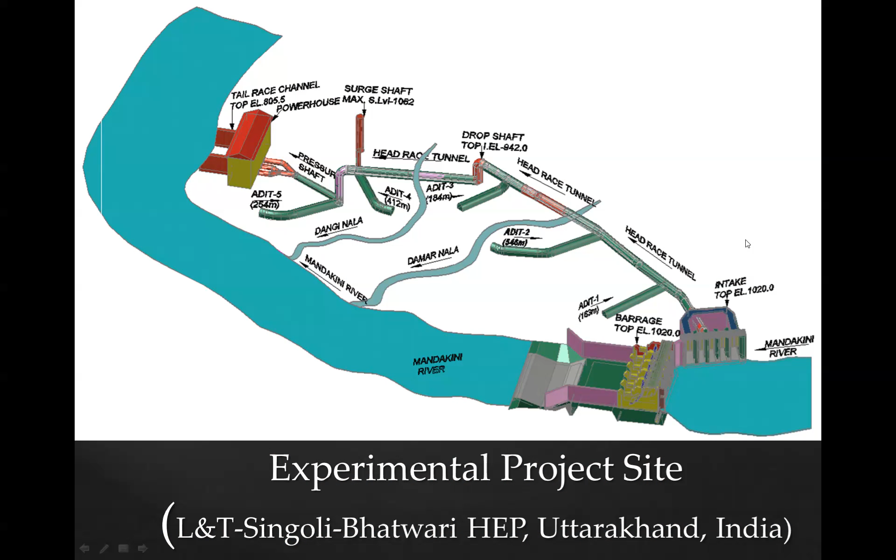What I have done is I have drilled some cores from the tunnel after excavation. You can see these cores. This is basically triple tube core barrels. It's very important that I use triple tube core barrels so that during drilling we don't induce fractures. Then we calculated different parameters. These are all the cores. You can see such beautiful cores.

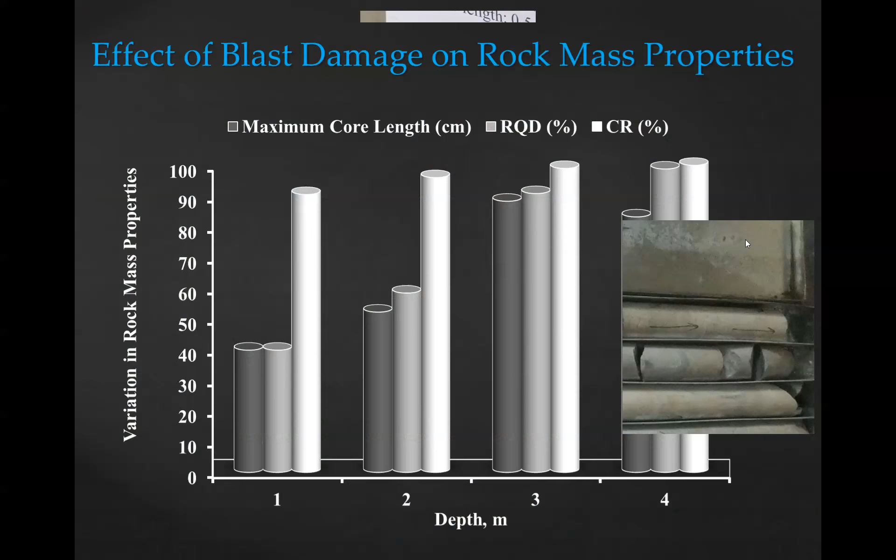Now imagine what is core recovery, what is RQD, and maximum core length, and how it varies with distance away from the tunnel opening. You see here the maximum core length and RQD is very less in the first 1 meter of the tunnel in the rock mass, but as you move away, it is gradually increasing. That is an indication of the extent of rock mass damage.

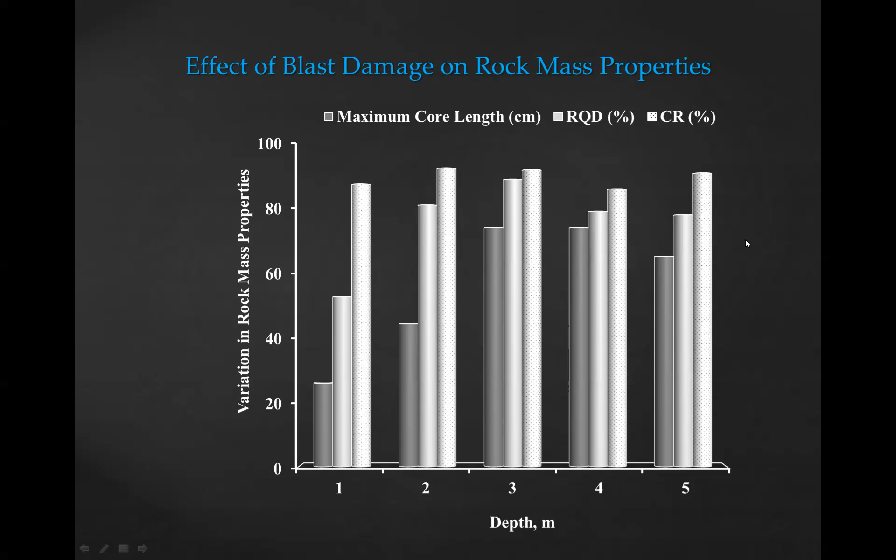I will show you some more qualitative figures. This quite obviously happens, and it is in a biotite rock mass.

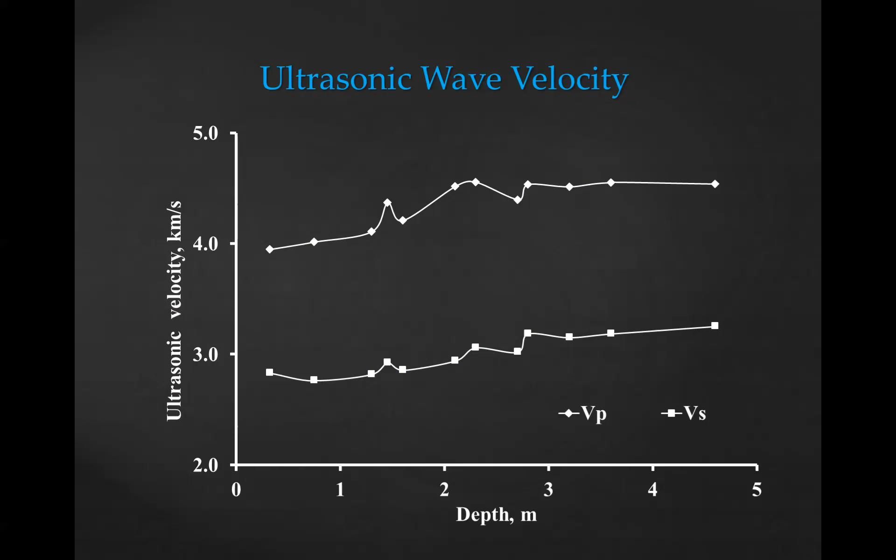So you can easily correlate the difference in VP, how much it will change the strength properties. I will show you these differences. There is an interesting paper where a 10% reduction in the P-wave velocity of the rock mass is counted as a damage distance. So the distance up to which there is a 10% reduction in P-wave velocity is counted as the damage distance. You can find out how it is varying.

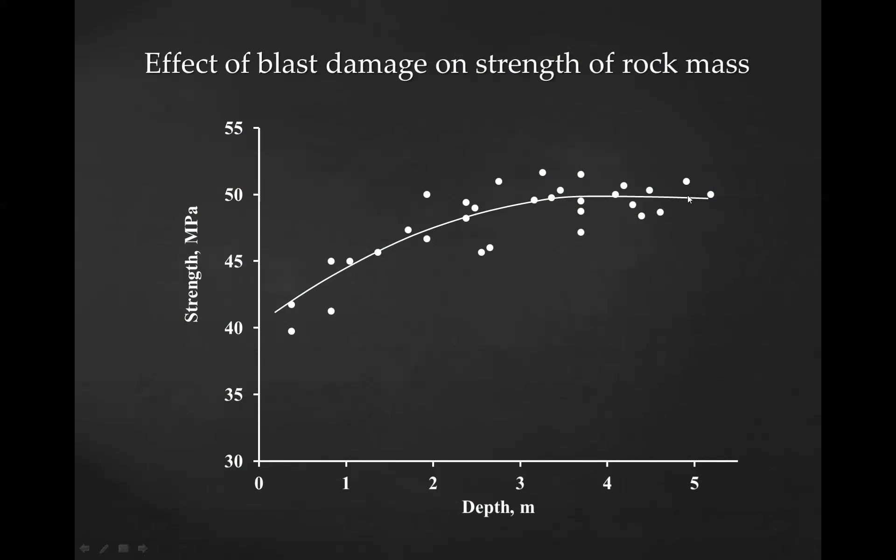Let's go on to next part.

This is another very recent research that I would like to share with you. What I did is from the same core, I prepared some thin sections. From these thin sections, every half meter, from the first half meter, then 1 meter, 1.5 meter, like that, I moved on, and then I analyzed it.

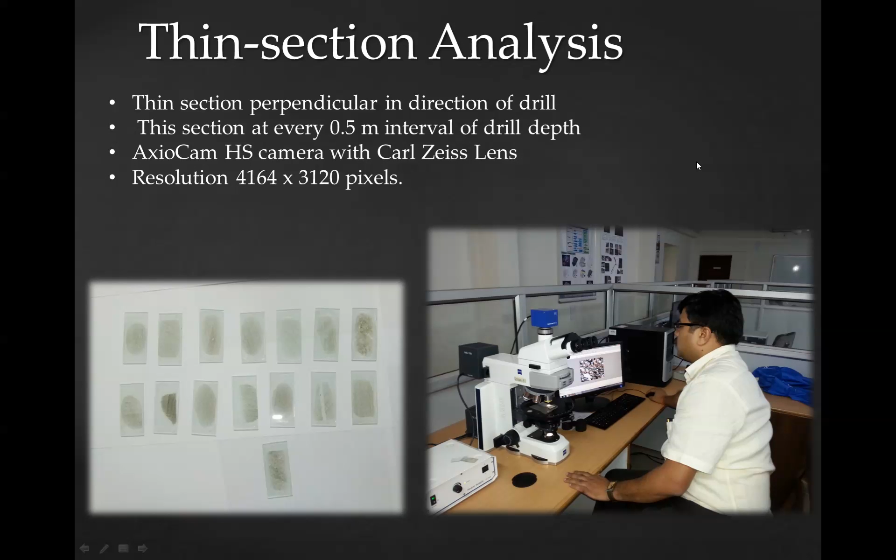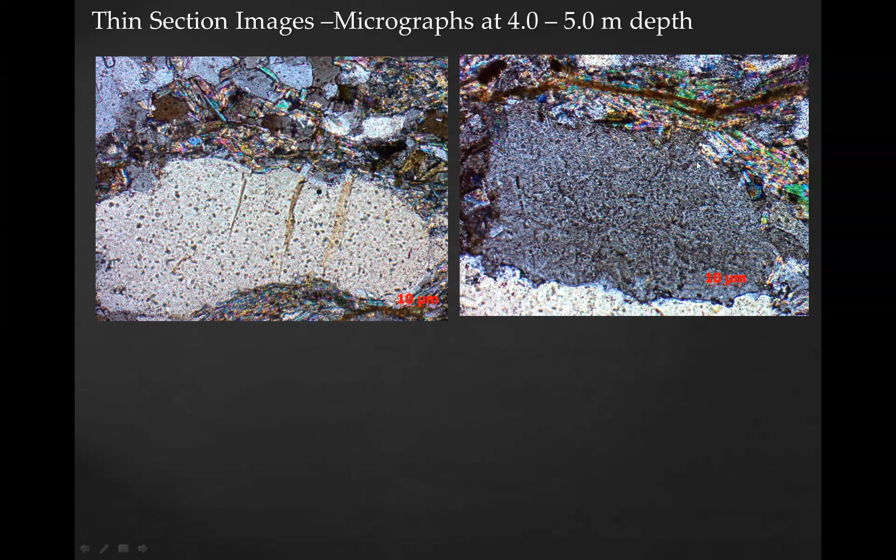This is an important part, because we come across a lot of problems wherein we keep fighting with the perception part. Blasting is perceived differently by different people. Educated people perceive this blasting operation very differently compared to somebody else. If somebody engaged at the project site is an employee of the project, possibly his tolerance level is quite high compared to anybody else who is not directly benefited by the project.

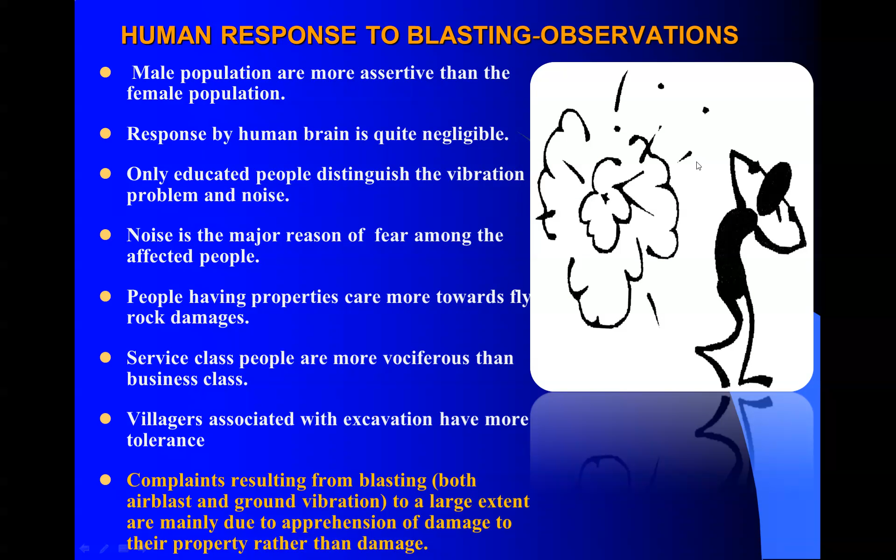So these are all the things. When you come across a blasting site, you need to deal with all these issues, and then it becomes absolutely difficult to make them understand whether it's because of the blasting or not. And we carry out a very extensive program for this.

So I've already explained this, and I think with this I would like to repeat the guiding principle of tunnel blasting. If you do it in a scientific way, possibly we can create miracles with blasting also, and we can contribute in a very different way.

So with this, there are 3 parameters you need to play around with. Please remember this. One is energy distribution, meaning how you are actually distributing explosive within the hole. Then energy confinement - what is the selection of your explosive diameter and hole diameter. This also means if your tunnel cross section is very small, say 15-20 square meters, you cannot drill a hole depth of 3 meters. You need to understand that, because that will increase confinement. So that is also called confinement.

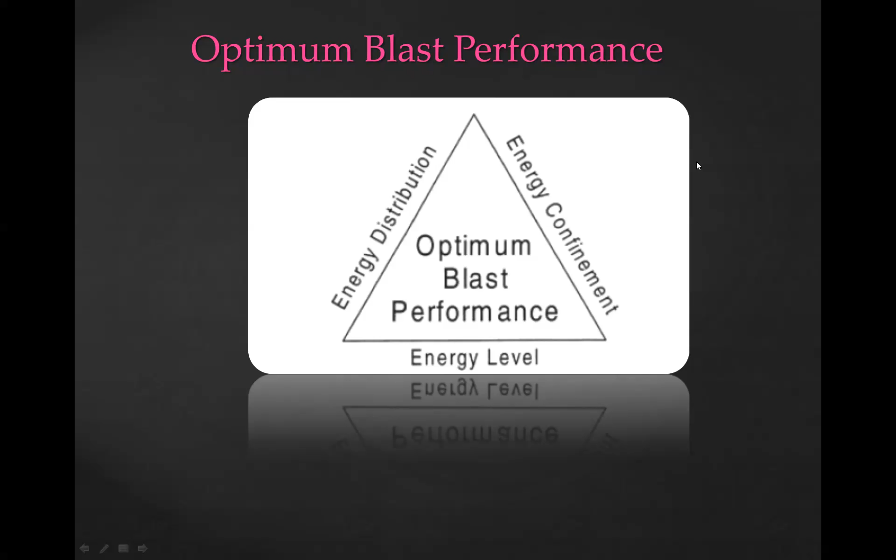And the last part is energy level, which I explained - 601 or 901 or 801, whatever you want. So if you have the right kind of energy confinement, right blasting pattern, correct explosive, possibly there should not be any problem with the drilling and blasting operation, and we can continue doing drilling and blasting.

So with this, I would like to conclude, and I really thank you very much, Dr. Khan and the team, for giving me this precious time. Thank you very much.